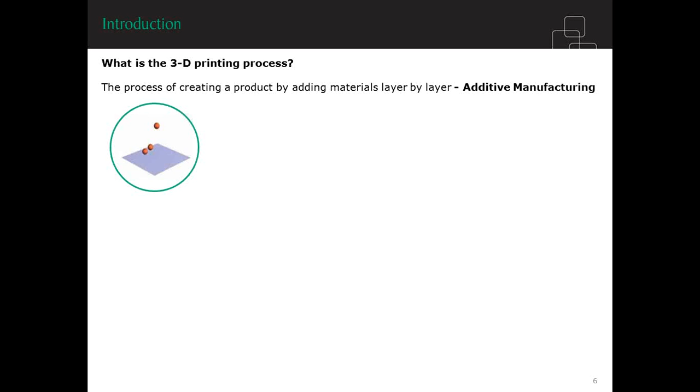It is the process of creating a product by adding material layer by layer, which is also called additive manufacturing process. Let us understand this process visually. Here you can see a plane with a few raw material particles being deposited by a 3D printer. As the process of deposition continues, the required amount of raw material is being deposited on each layer. Moving forward with the process, over a period of time, multiple such layers are formed over each other to finally create a product, which in this case is a cylinder. This is what we call an additive manufacturing process.

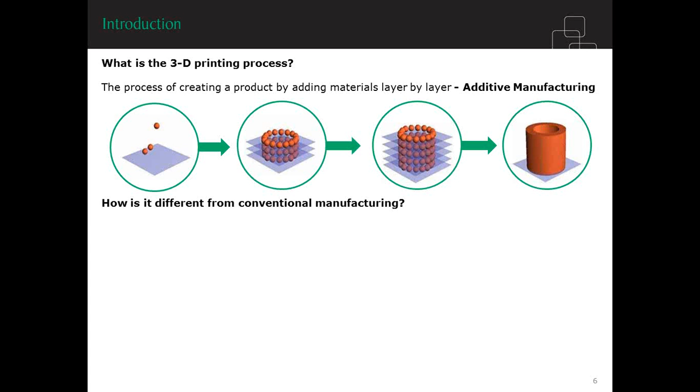But you would be thinking, how is it different from conventional manufacturing processes which we have today? To give you a brief idea, 95 to 98% of conventional manufacturing processes today involve removal of material from a block to get the desired product, which is also called subtractive manufacturing.

To better understand the difference between these two processes, let me take an example of a subtractive manufacturing process. As you can see on the screen, we have a metal block which is the primary raw material for a subtractive manufacturing process. As the process starts, material is removed from the block using tools as per the design requirements, and this continues till you get the desired shape and size, which in this case is a metal bracket.

This clearly shows that compared to subtractive manufacturing, the 3D printing process involves optimum utilization of raw material.

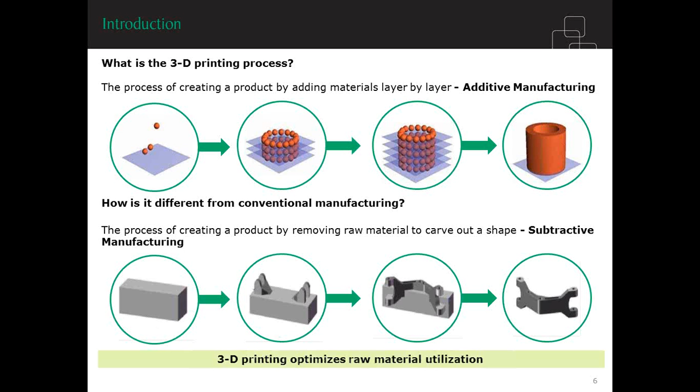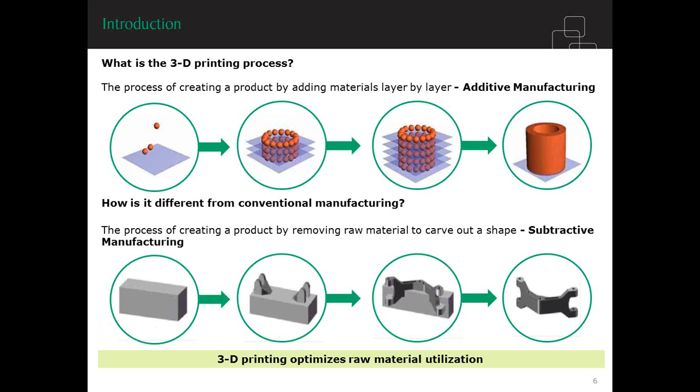Now, to further evaluate this technology for its potential benefits to the buyers, let us look at some of the benefits which are associated with this 3D printing process.

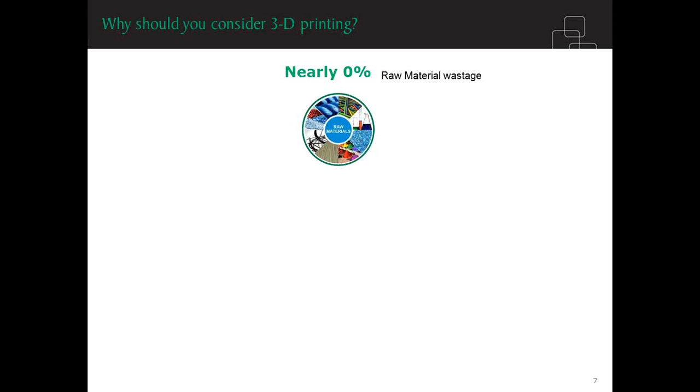One of the major advantages of using 3D printing is reduction of raw material wastage. As we have understood from the previous slides, raw material wastage can be avoided by this process. Raw material wastage savings are substantial compared to subtractive manufacturing and can be nearly 0%, meaning no wastage of raw material.

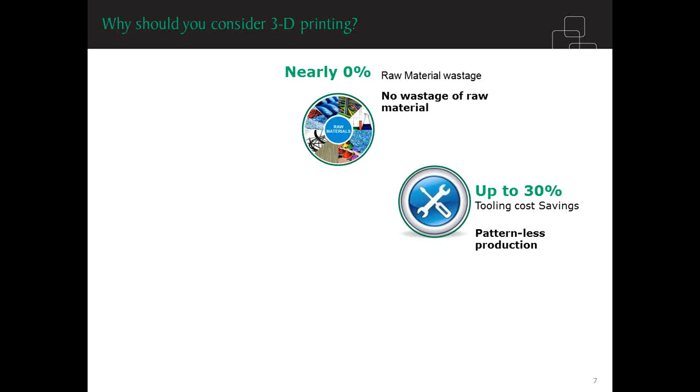Then buyer can also achieve savings on tooling. As we have observed, up to 30% cost reduction is possible on tooling, primarily by eliminating the need for molds and patterns and manufacturing of jigs and fixtures during production, which basically means patternless production.

Moving ahead, another advantage observed of 3D printing is labor cost reduction. By using 3D printing, the buyer can reduce the assembly labor and production labor required for a product. This can help buyer to reduce up to 30% cost in labor.

Moving ahead, 3D printing also plays a critical role in the product design phase. It makes the process much simpler and faster for a complex product as well. This benefit can help buyer achieve up to 30% cost reduction in prototyping without any added cost for the complexity of the product involved.

Last but not least, 3D printing can also reduce the lead time up to 97% due to saving on time during the tooling process, the assembly and the prototyping phase, which will ultimately reduce the total cycle time.

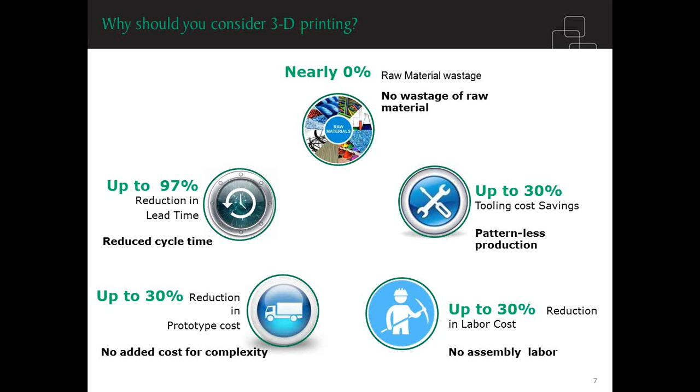Having looked at all the benefits associated with 3D printing, you would be wondering, wow, the benefits seem to be good. Yes, the benefits are revolutionary indeed. But the next logical question is, can everyone shift to 3D printing?

Well, in subsequent slides, I will help you understand if 3D printing can be adopted by an organization and when you can really consider investing into 3D printing.

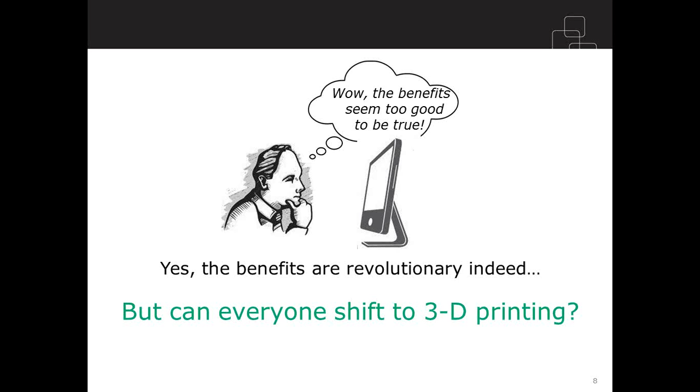You can consider 3D printing if you have high design complexity involved, which means intricate shapes and designs which cannot be manufactured using conventional processes of manufacturing. For example, a complex component of a jet engine wherein design precision is high can be prototyped as well as manufactured within a short time through 3D printing.

Moving ahead, you can consider 3D printing if you have requirement for small lot production, which basically means just-in-time requirements. Consider an example of a replacement part for an OEM capital equipment. The requirement of a spare part during the maintenance cycle is very important to reduce the downtime during maintenance. Therefore, in-house production of a part through 3D printing can help in reducing the downtime as well as the cost associated with sourcing a particular product.

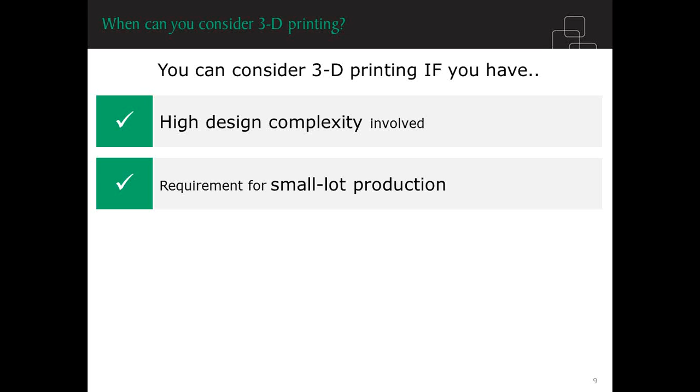Moving ahead, you can consider 3D printing if you need a shorter product development cycle in response to changing market demands. For example, consider a consumer goods company which requires frequent design iterations for a product to be performed within a short time in response to changing preferences of the end user. 3D printing as a technology can play a very important role in reducing the time to market for such kind of products.

And finally, you can consider 3D printing if you have a requirement for providing customized products to your end user. Here we can consider an example of a contract manufacturer of a spare part who can adopt 3D printing to provide customized spare parts as per the requirement of the buyer during a maintenance or repair cycle, which will reduce the lead time as well as the inventory cost involved in storing the product.

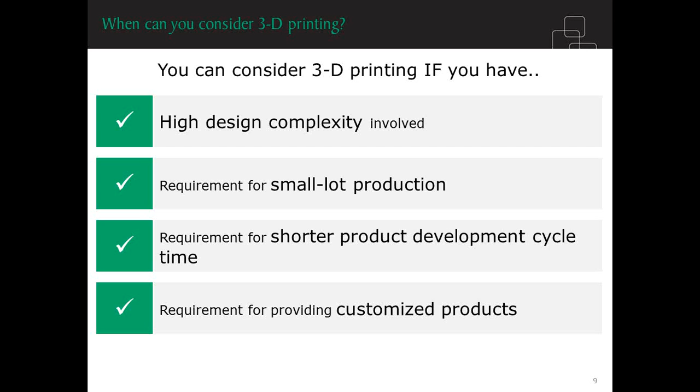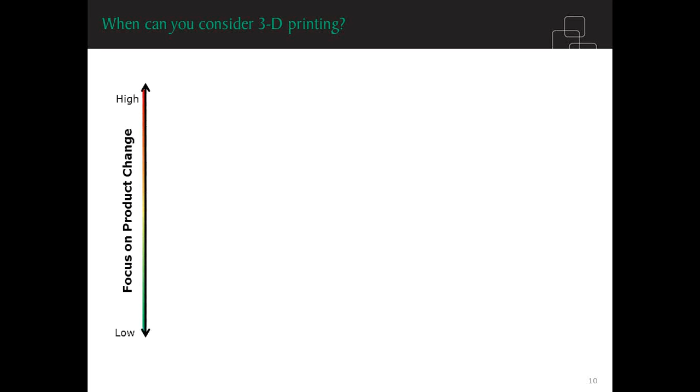Having identified the different requirements which can be met by 3D printing, it is important to know how 3D printing fits into your business objective. As you can see on the screen, we have the y-axis with focus on product change marked from low to high, and on the x-axis we have speed to market marked from low to high as per different end user requirements.

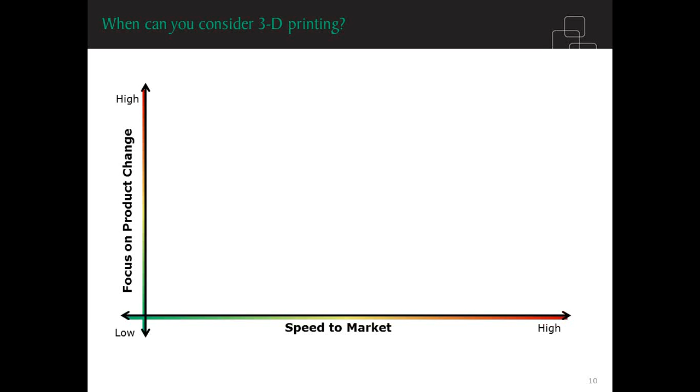The graph has been divided into two sections to depict two different sets of organizations. The first section has company A, which represents organizations with low focus on product change and speed to market. And in the second section we have company B, which represents organizations with high focus on product change and speed to market. Let us look at how company A can leverage the 3D printing technology to achieve its business objective.

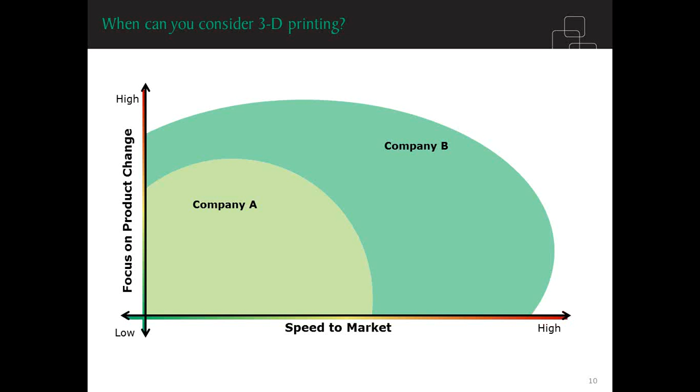Now moving to company B. The primary focus of these organizations is on product differentiation through customization and faster response to market demand. Let us look at how company B can leverage 3D printing to meet its strategic objectives.

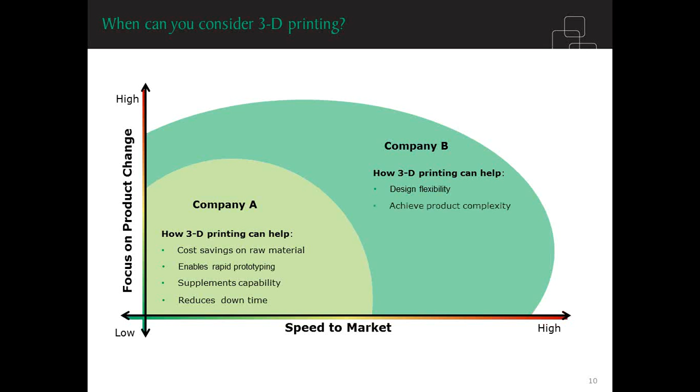Company B can achieve its business objective through high design flexibility associated with 3D printing, meaning the freedom to change the design and produce a functional prototype for testing within a short period of time. Second, company B can achieve product complexity during the design phase without any added cost, so complex and robust product designs can be easily prototyped and manufactured using 3D printing.

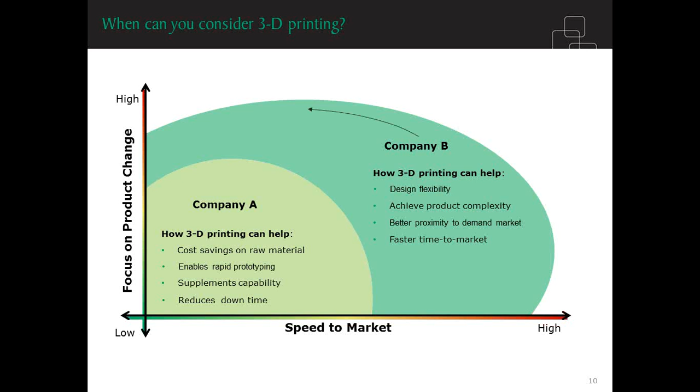Company B can also benefit from better proximity to the demand market, which in turn impacts speed to market and faster time to market, providing company B with a first mover's advantage in the market.

To summarize this slide, 3D printing can be adopted by different end user industries to meet their specific objectives. Having said that, let us look at some of the challenges associated with this technology.

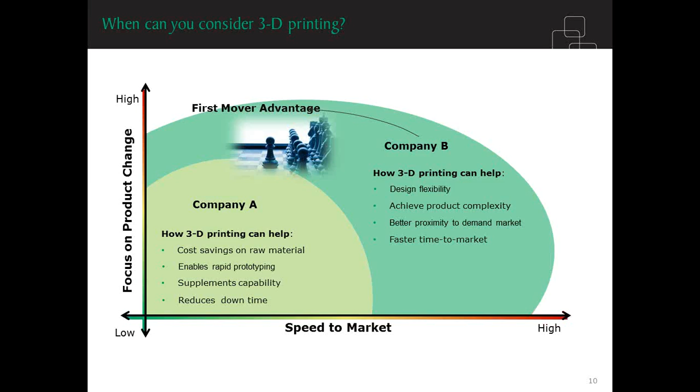One of the major challenges associated with 3D printing is raw material or feedstock cost, which is currently high. This is because the manufacturer has complete control over the raw material used for 3D printing, and the manufacturer of 3D printers charges a premium for processing the raw material to make it ready for 3D printing.

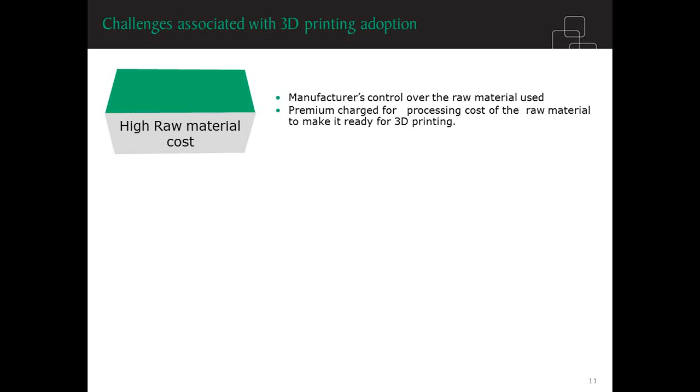Moving to the next key challenge, which is the high cost of 3D printers. The cost currently ranges from $50,000 to $200,000. This is due to the consolidated supplier base of 3D printing manufacturers and the patented technologies involved in building a 3D printer. But according to our observation and study, prices of 3D printers are expected to come down in the future as adoption increases in the market.

The third challenge we'll discuss today is slow 3D printing speed compared to conventional manufacturing processes. Speed is one of the major concerns currently. However, latest technologies like high-speed sintering will improve the 3D printing process in future.

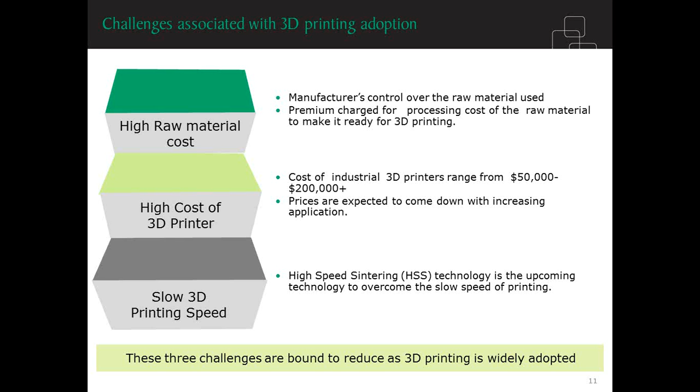These three challenges are bound to reduce as 3D printing is widely adopted by different end user industries. Now that we have seen the current challenges of adopting 3D printing, it is important to understand that to justify its adoption, the buyer should first identify the application of 3D printing in their organization.

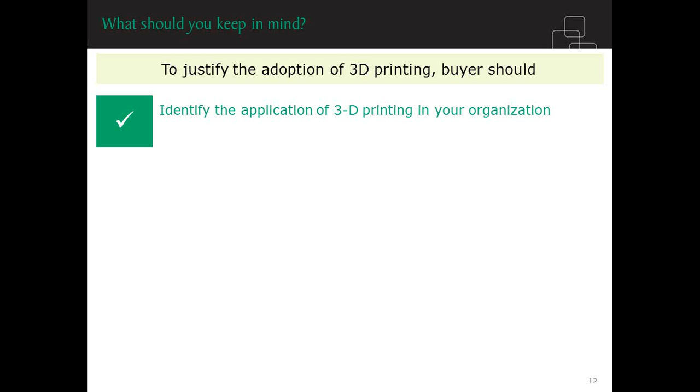So what is the important question here to be asked? What do you need it for? 3D printing can be adopted by an organization during an initial phase for rapid prototyping, as well as for final production through rapid manufacturing. This is important because the kind of 3D printer required for prototyping and manufacturing differ in terms of initial investment and raw material consumed.

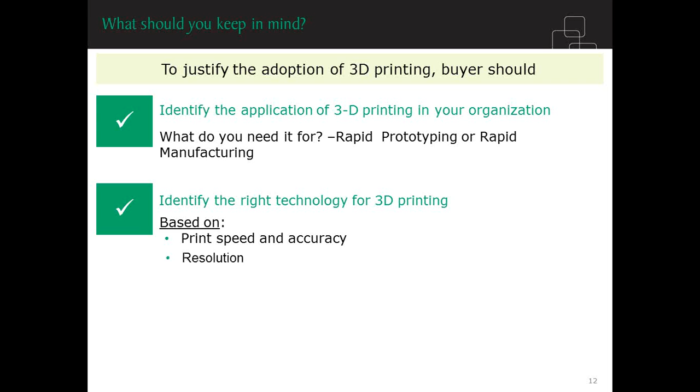Moving ahead, it is important to identify the right technology for 3D printing based on the printing speed and accuracy offered, the resolution, meaning the finish achievable by a particular technology, and finally the raw material properties required for your specific products. Once you have identified the application and the right technology, the next step is to identify the right engagement model to be adopted.

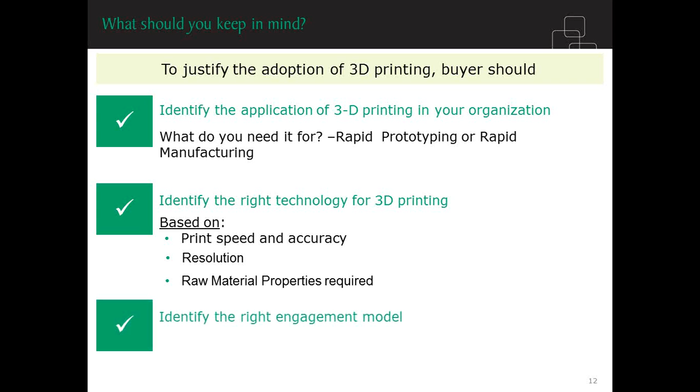So moving ahead, let us look at the possible engagement models for adopting 3D printing. The first model is the in-house model.

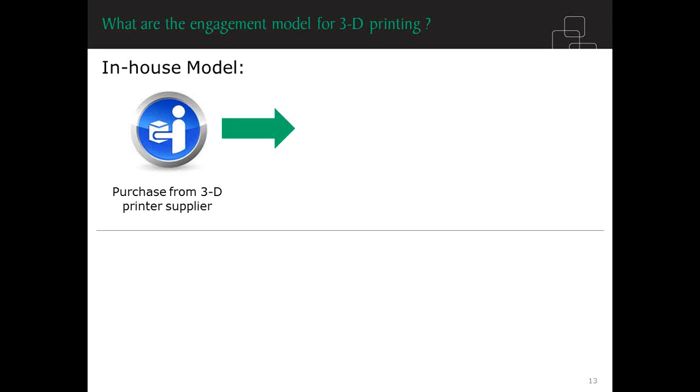This model involves the buyer purchasing a suitable 3D printer as per their requirement from a supplier, installing it at their design or production location, and finally creating the product design or prototype by sending digital files to the printer from a design software.

Buyers should consider the in-house model when their product requires constant and frequent design iterations, and the product design is confidential and cannot be shared with a third-party service provider. To summarize, this model is apt for high-value and patented products.

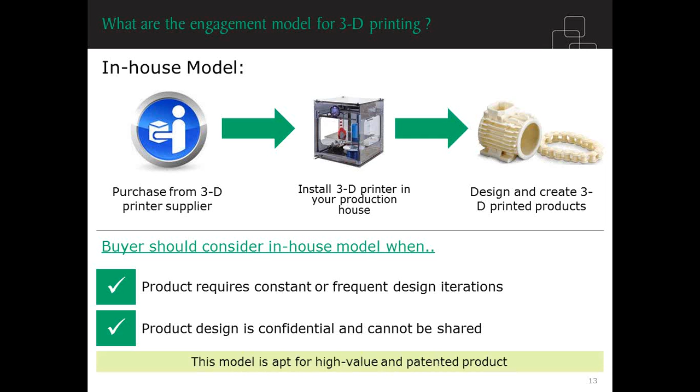Now moving to the second model, which is the outsourced model. This involves outsourcing the 3D printing process to a third-party service provider. The process starts with identifying the right service provider based on technology, geographical presence of the supplier, and the price charged by the supplier.

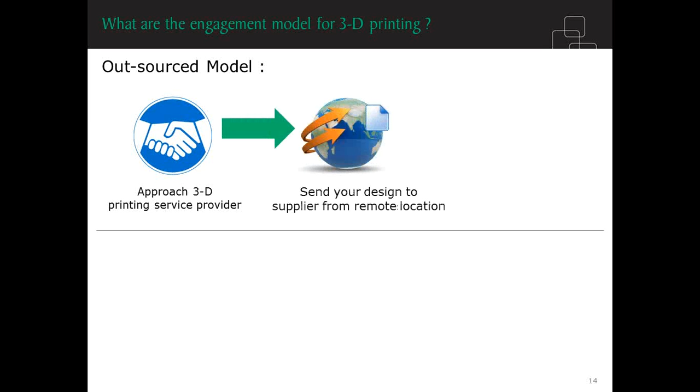The process next involves sending your design to the supplier from a remote location, and finally the supplier creating a 3D printed product for the buyer.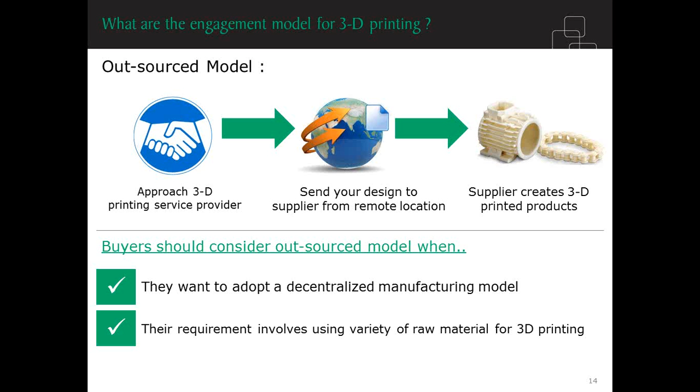Buyers should consider the outsourced model when they want to adopt a decentralized manufacturing model and their requirement involves a variety of raw materials for 3D printing, since different 3D printing technologies use different raw materials. Therefore, it is important to understand the kind of raw material and product to be 3D printed. To summarize, this model is apt for low value and highly customized requirements.

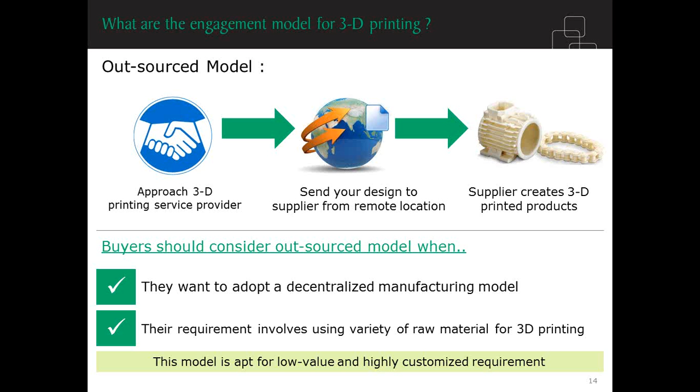Now that we have discussed the benefits and the adoption model of 3D printing, let us look at some real-time examples in industry where 3D printing has successfully made an impact.

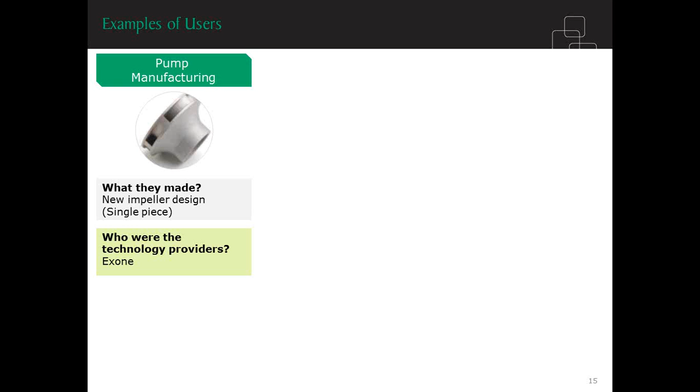The first example is from pump manufacturing. Here, a new impeller was designed using 3D printing with the help of a supplier called Exone, one of the major suppliers of 3D printers in the market. Through 3D printing, the pump manufacturer reduced the prototyping cost by 90% and was able to reduce the lead time to 4 weeks from 6 to 12 weeks earlier, a substantial saving on cost and time.

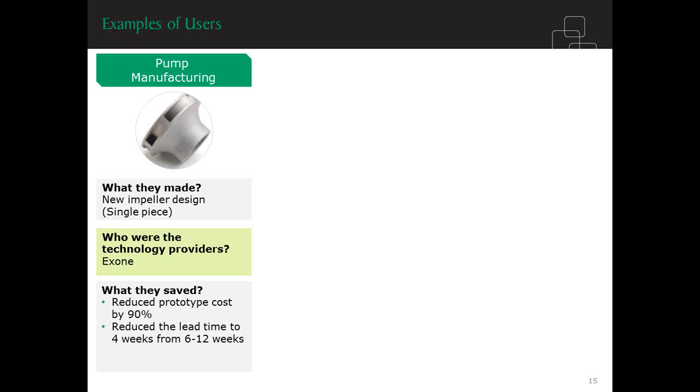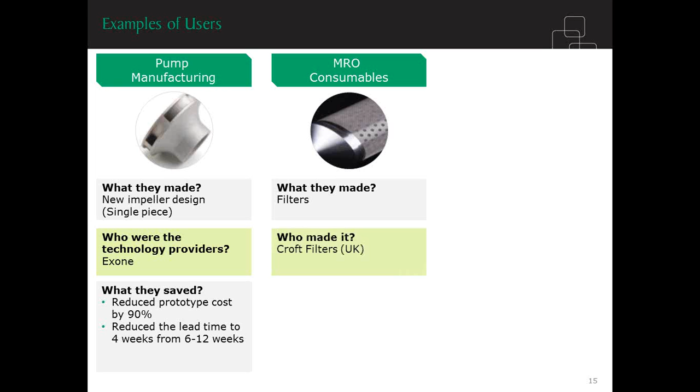Our second example is from the MRO consumables industry, where a filter was designed and manufactured using a 3D printing technology called laser sintering. A supplier called Croft Filters manufactured this filter, providing a customized product to his client as per requirement, and successfully reduced the product development cycle time by 50%.

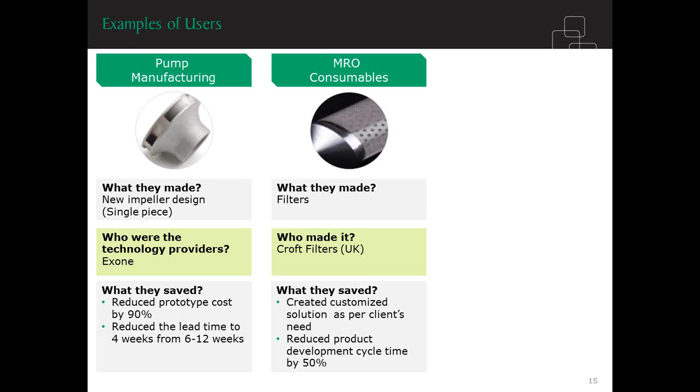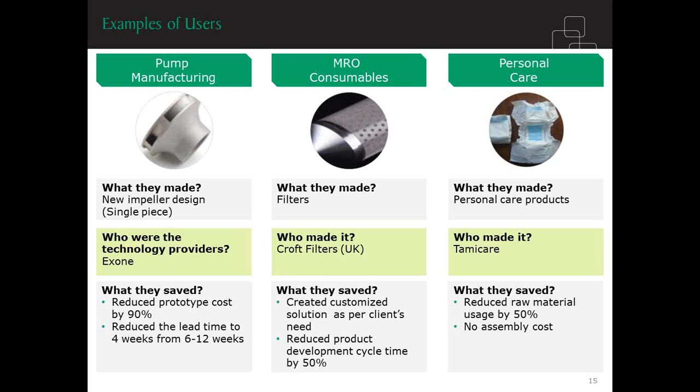Here we have seen some real-time examples of 3D printing achieving specific objectives for buyers and suppliers. Now, to recap what we have discussed, let us look at the roadmap for adopting 3D printing.

The first step is to identify if and where 3D printing can fit into your organization. It is important to understand what kind of products and what kind of process should be selected so that 3D printing can be used, whether for prototyping or rapid manufacturing as per the requirement.

The next step is to estimate the potential savings which can be achieved by reducing raw material utilization, eliminating tooling cost, and reducing assembly cost and prototyping cost.

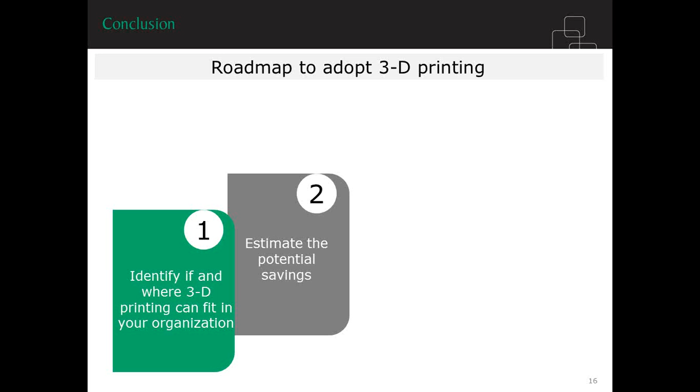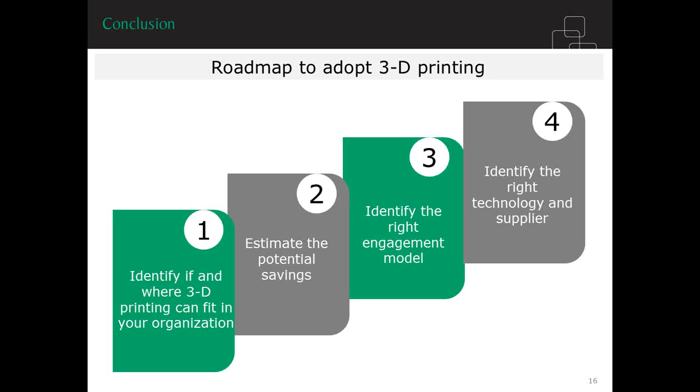The third important step is to identify the right engagement model suitable for your organization based on parameters like the cost of the 3D printer and the expertise available with the buyer. And the final step is to identify the right technology and supplier for 3D printing. This was the overview for adoption of this emerging technology called 3D printing.